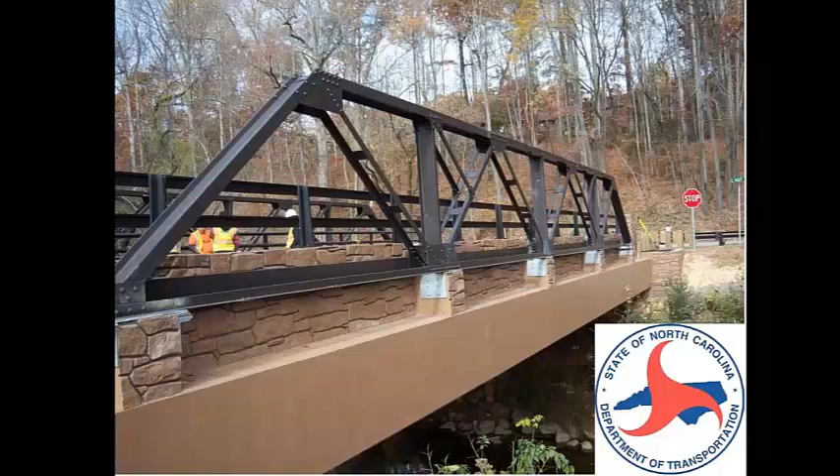I'm not going to say that first name. I need to go back to school and take a chemistry class on some of these products.

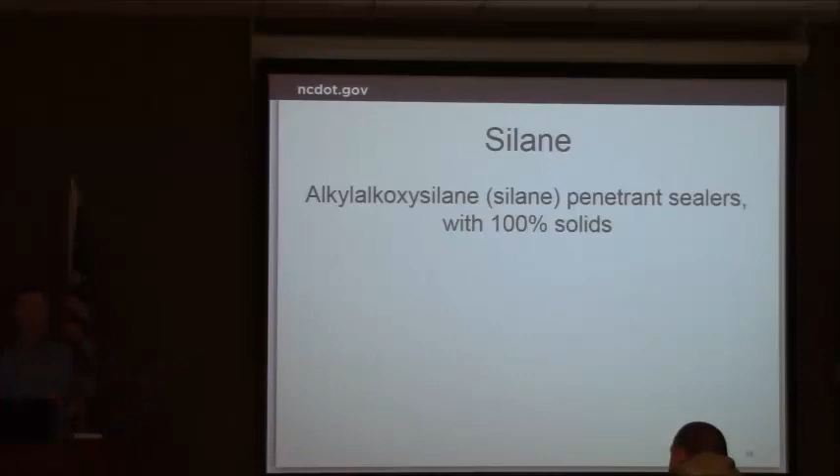But anyway, this is another one. It's not an overlay, it's more of a sealant type product. This is our cheapest option. This is something we just started doing. We've done a little bit of it on some girders; if they have some small cracking or some concerns, we'll do it. But we just started putting this on bridge decks. So I put this slide on here.

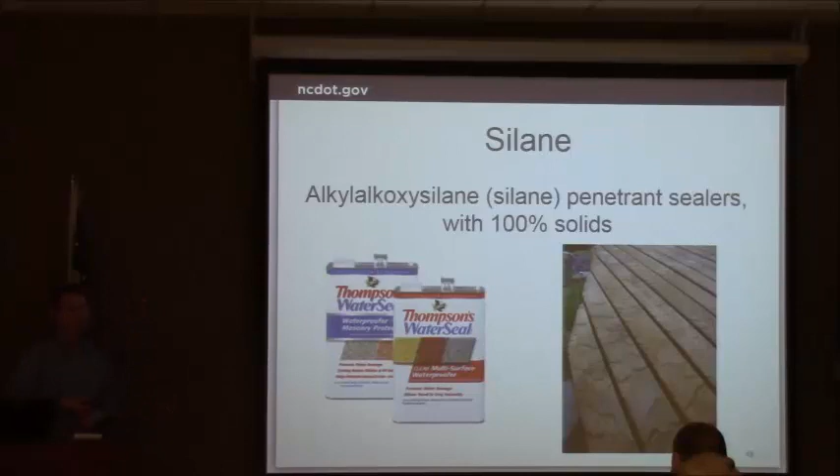Obviously, it's not Thompson's Water Seal we're putting down, but it's pretty much the same concept. You put that down on your deck, you see the water beading up on it. We're going to do the same thing on our bridge deck.

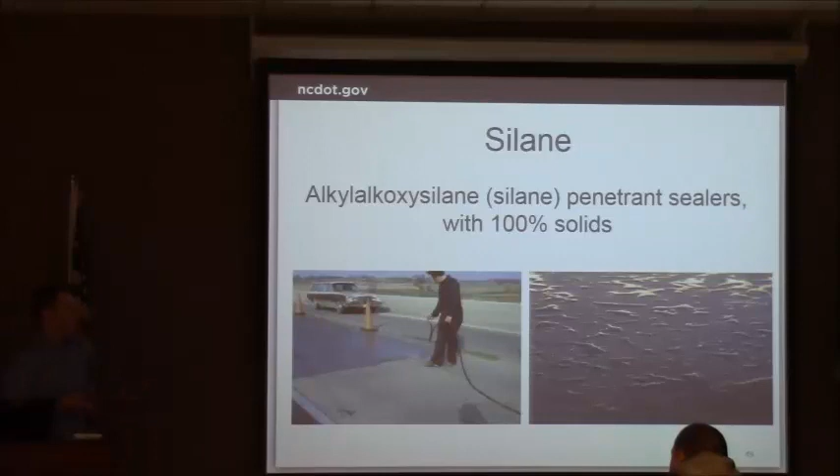But really, it's a sprayed-on application, and there's some science to it. It penetrates down into the concrete, and then it waterproofs it. It doesn't fill our cracks, but it helps resist and turn away that water. So here's just a diagram. You can see here, we're going to spray it.

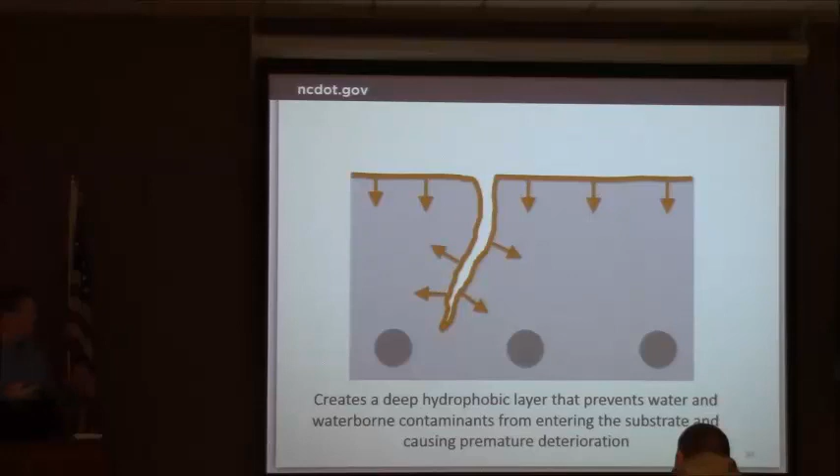It's going to penetrate. It probably doesn't penetrate this deep in the cracks, probably an over-exaggeration, but it's going to go down a little bit and seep down into the concrete. It doesn't fill the crack, but it creates a hydrophobic layer. Basically, it resists that water wanting to get down in that crack or penetrate down in the concrete.

So if it's raining, you'll see it: right beside where you haven't treated it, it's saturated, soaking into the concrete. Where you put this, it beads up and doesn't go down in the concrete. What we're trying to do is keep those chloride ions from getting down to our rebar. This resists that.

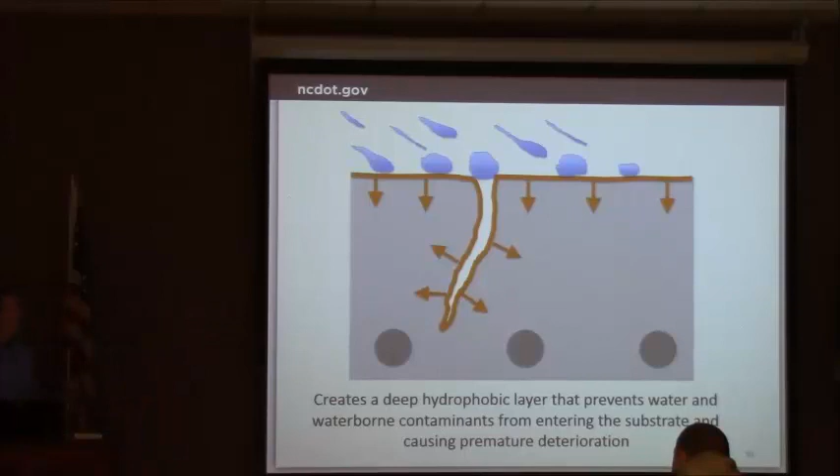We don't change the grade. It's quick drying time, so you can get traffic back over it real quickly. The best thing is it's economical and easy to use. So if we get this in our maintenance cycle, we can treat with silane and keep the bridge in good condition if we do it every 7 to 10 years.

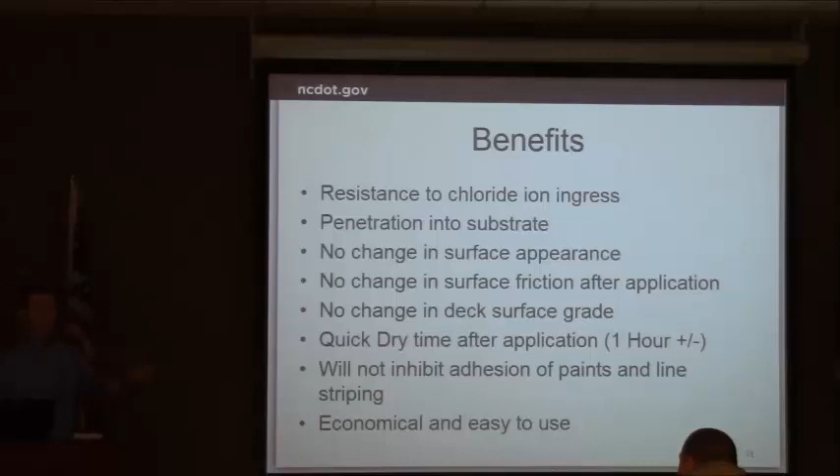Pretty cheap. So there's two types of silane, 40% and 100%. You'll see both on the approved products list. But for contract use, if you have a project where you're doing silane on a bridge deck, you've got to use 100% silane. Bridge maintenance may have used some of the 40% in the past, but we are only using 100%. It's just a better product.

It's going to last longer, especially for bridge decks, because with vehicles going over it, it wears pretty quickly, right? So we want to make sure it's going to last. It's just more flammable than the other one, so you have to use caution around it. I wouldn't recommend smoking around it, or pretty much any of these overlays. Some may be more flammable than others. It's not a good idea to be smoking around this type of work. Again, it penetrates down into the concrete.

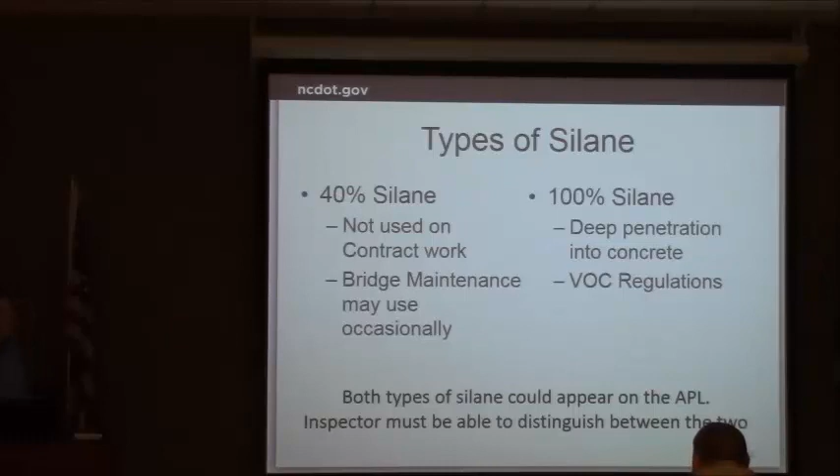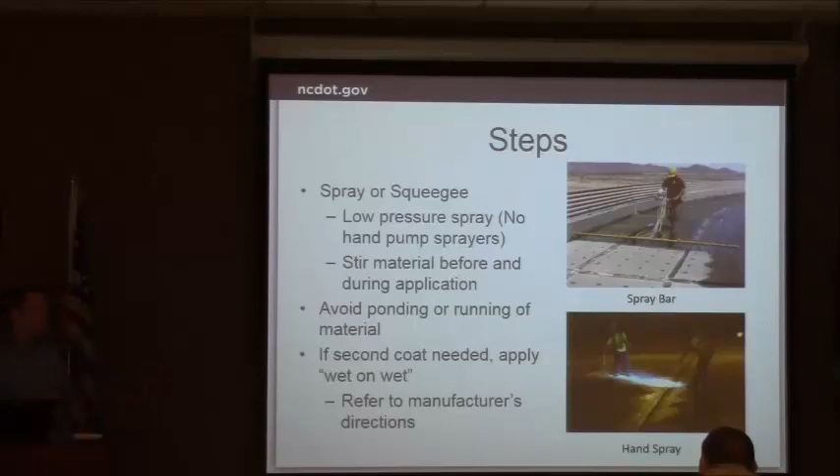You do need to determine the rate. We don't have a rate in our contract. The manufacturer's rep is required to be there to start with. They'll help you in trying to determine the rate, because each deck is more or less porous depending on which deck you're on. So some you might have to put more product, some you might have to put less. Sometimes you might have to put 2 coats. We're going to do a test to determine that, which will help at the beginning, and I'll show you that in a second, how much we're going to need to do.

The approved products list, if you go looking for silanes on there, more than likely the one that you're going to use on a contract is not even on the APL yet. So we're working on trying to get those manufacturers to submit that and get those approved so that you can refer straight to that without having to do a submittal to structures management to see if it's acceptable or not.

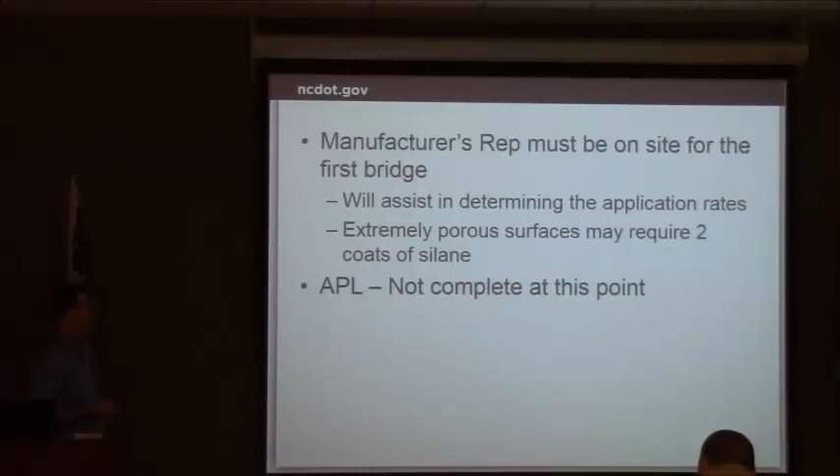Limitations: must be dry. So our special provision says 48 hours. So you're limited on if you're able to put it down. Now, the resident might be able to make some judgment. If it's 90 degrees all day and bright and sunny and it rained yesterday, he may still let you put it down as long as some of those moisture checks are okay.

40 to 90 degrees is a pretty good range. Winds less than 20 miles per hour, so you don't want this stuff blowing into cars and everything. Make sure you're looking at the weather afterwards for 12 hours. Again, it's flammable, and then any new concrete or patches have to be cured for 21 days.

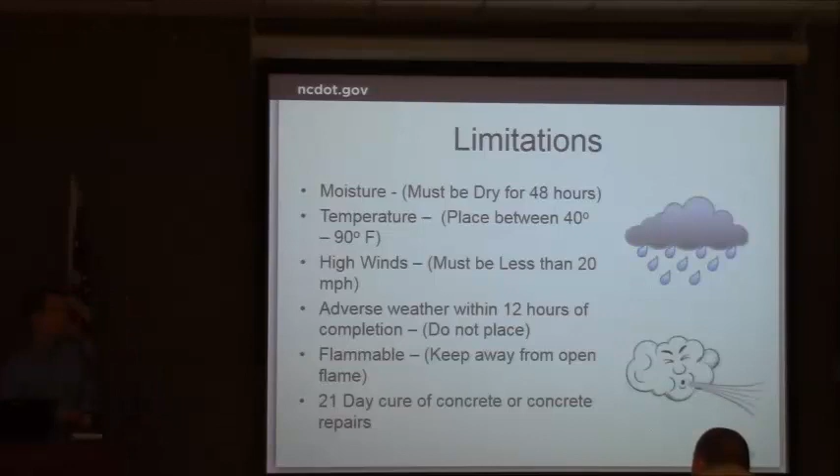One thing, some states are actually using this on new bridge decks. So they finished construction, they may or may not turn traffic on it for a few months, and then they come and spray it. So they're basically protecting it from the very beginning, just keeping those chloride ions out of the deck. We can use it as a preservation option as well. We've considered that. We may at some point go ahead and do our new bridges. It's so cheap for the investment, protect our investment. It might save us money in the long run.